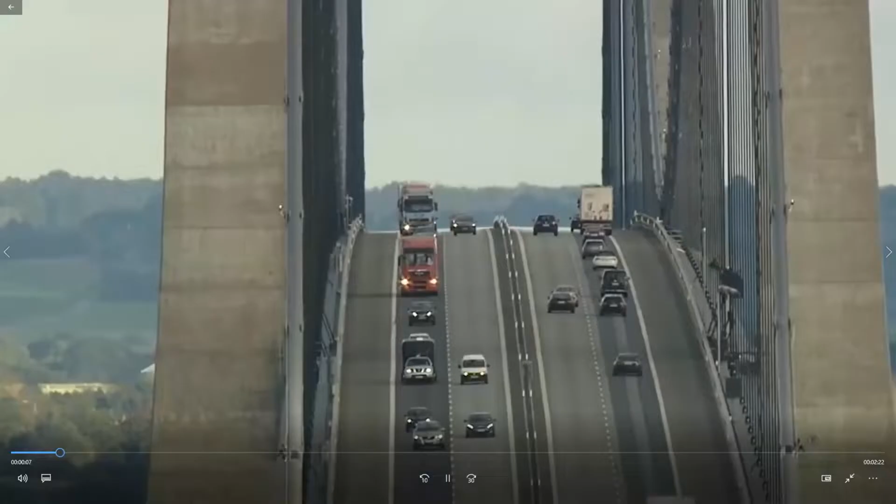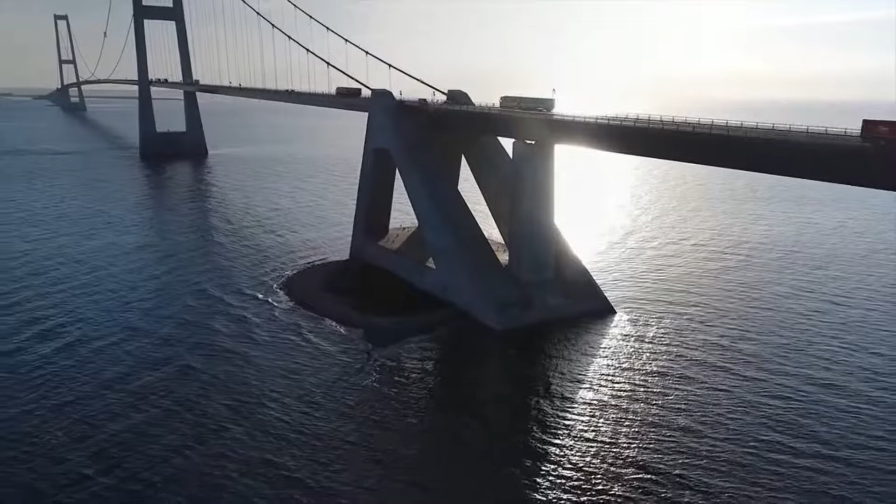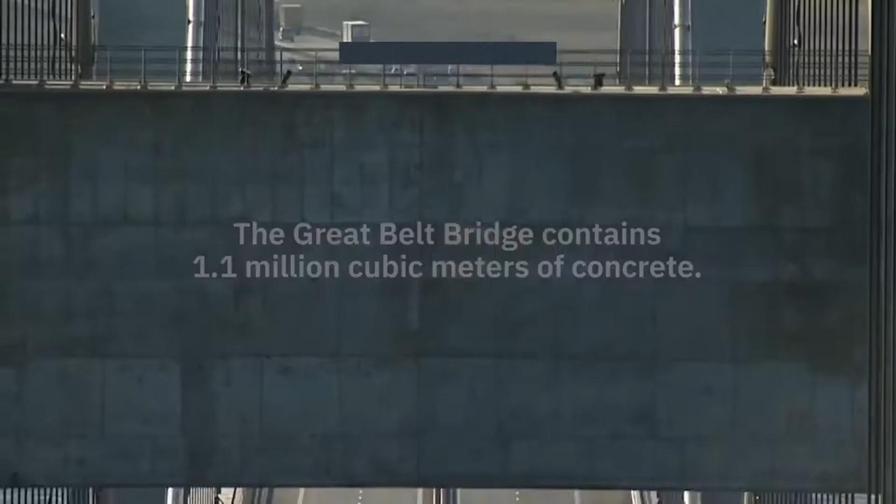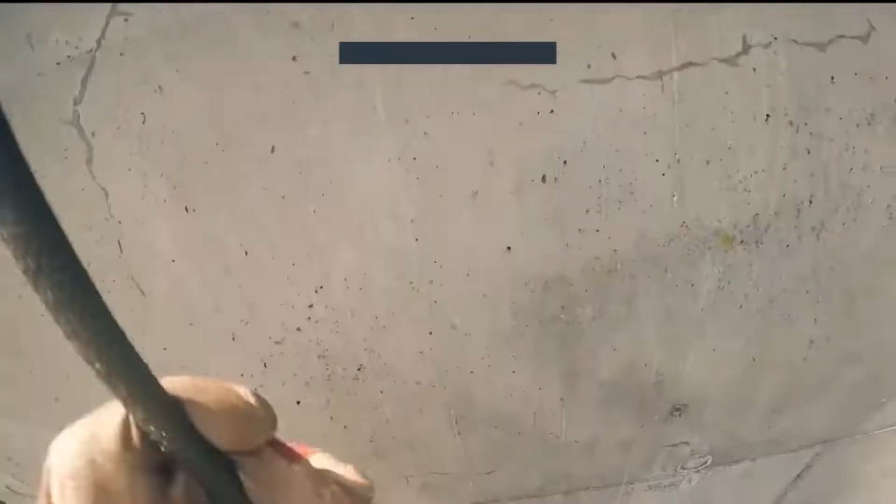To the untrained eye, a bridge appears to be permanent, strong, stable, and it's not really moving. But this is an illusion. If it hasn't been inspected in the right manner and maintained in the same manner, a very sad accident can happen. Maximo is a management system where we not only can write out work orders, but we see it as basically the foundation, the spine of everything we want to do from a digitalization point of view. The dream is that this technology can really help to reduce or maybe completely remove the risk of tragedies, collapse of bridges, collapse of tunnels, collapse of buildings. When we are having a bridge out in the sea, you have to be aware how the chloride is actually penetrating the concrete, because rust is one of the enemies for concrete structures. We literally have to hire mountaineers to climb the surfaces to actually do the inspections.

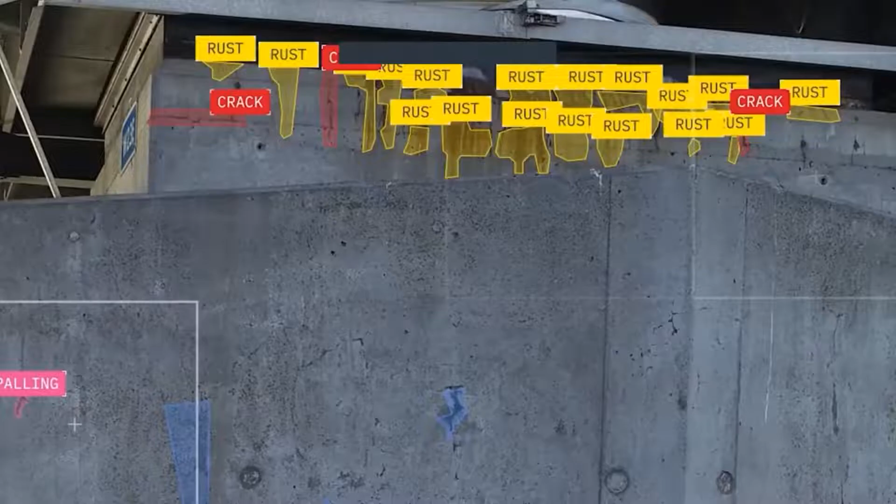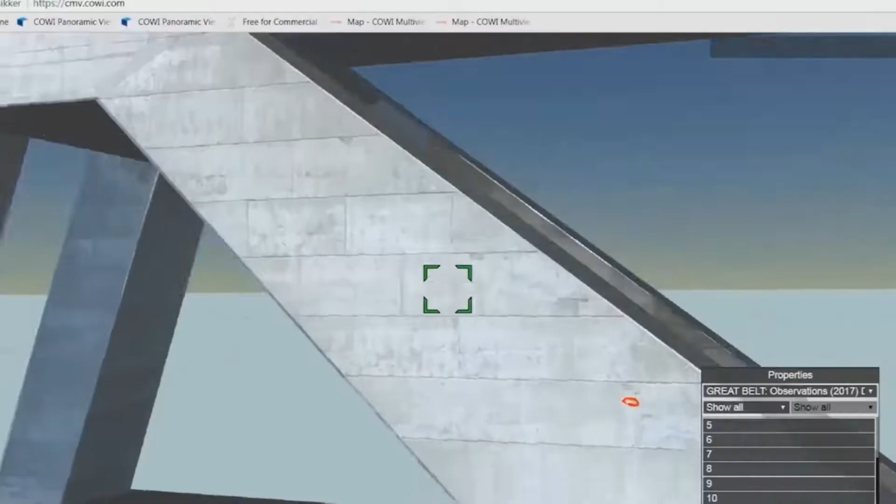There are many disadvantages to traditional inspections. People's life is in danger sometimes. Now we have changed that way of inspecting our concrete surfaces from the mountaineer climbing around to using drones now. Everything is done automatically. It's scalable. Scanning a bridge can take 1 day instead of taking a month. All this data that feed into Maximo from sensor, from document, from images and from other sources needs to be processed to extract knowledge, and that's where AI comes into play. There's a huge stack of informal data, unstructured data, and we need a machine that's able to read and process unstructured information. Maximo can do it in a fast way, in a repeatable way, in a scalable way, and once it learns to do the job, it learns forever. Now we have a way to show a complete picture of the health of a bridge. And it's not every second year or every 6 years we can do that assessment. We can do it from second to second.

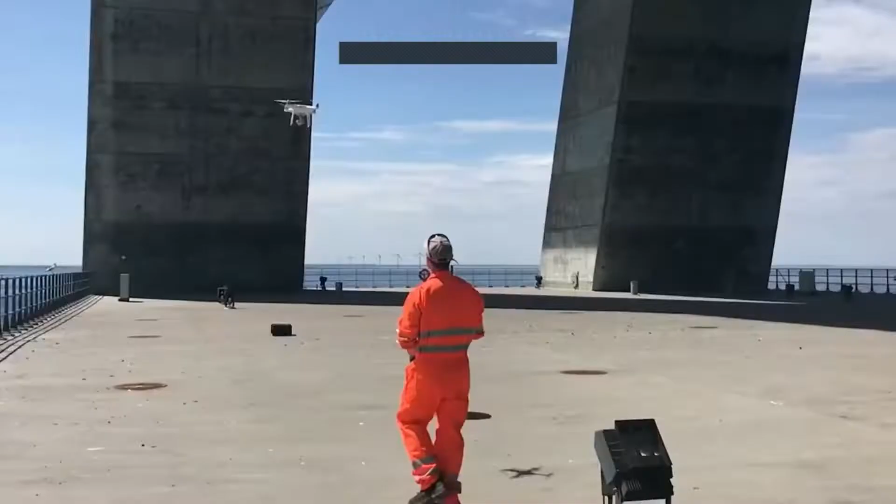If you are not energized with this, I don't know what. But I think for me it's very exciting to see all the different possibilities. And I'm happy to tell you that Ioana Giorgio, who is also working as a researcher and partner in the IMT project, is with us today. And Ioana, you will share more details of the technology and especially your own experience.

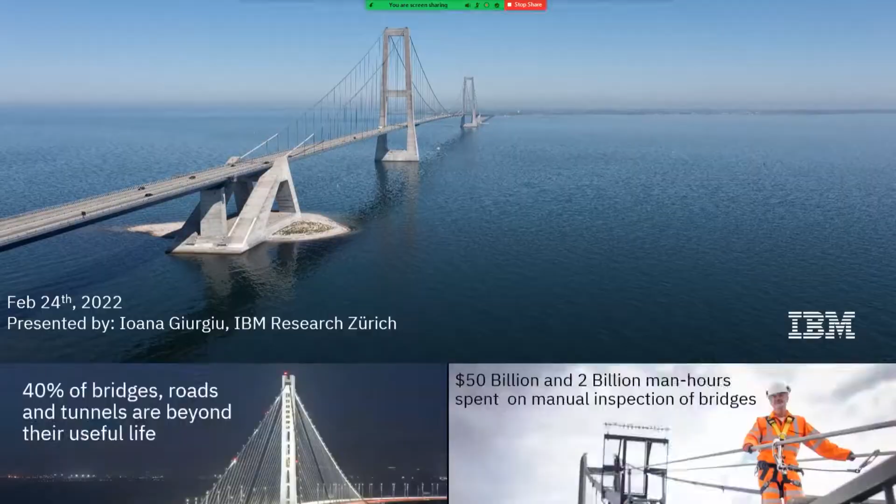So let's get started. So as you know, civil infrastructures like bridges, roads, and tunnels are actually essential for transportation. And more than 40% of these infrastructures across the world, they are past their useful life. So it's extremely important to make sure that they are in good condition, or if they need maintenance or repair operations, they can be done in a timely manner. That's the role, of course, of the reliability and civil engineers, who generally will go visit the structures and typically do manual inspections. Now, manual inspections are extremely time consuming.

So it is about 2 billion man hours that are expected to be put into the manual inspection of bridges alone. And of course, there is a high cost associated, about $50 billion, with everything that encompasses, of course, the travel time of the civil engineers and all the equipment they need to survey the bridge from all possible points.

Now, of course, what they do is they try to detect visually, right, whether that bridge or any civil infrastructure is actually in a good condition, because even one failure can shut down critical arteries. And so, moving to the next slide, how is it typically done?

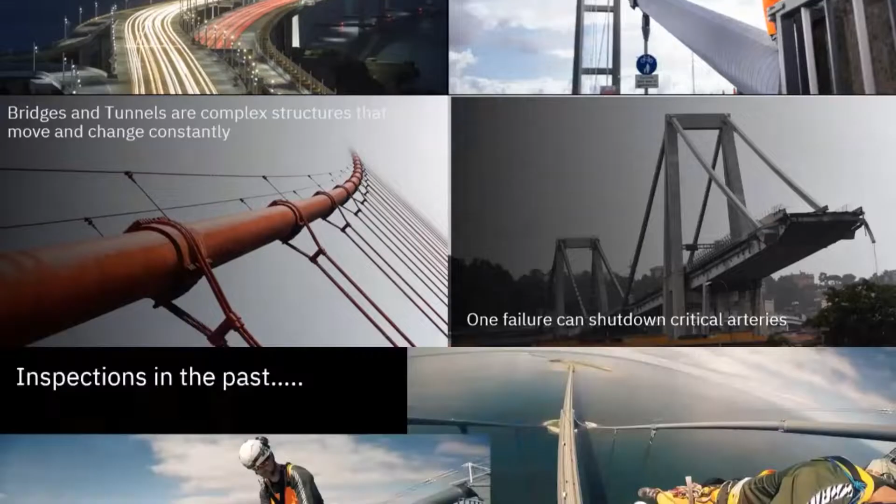So typically, or in the past, these inspections were 100% manual. So our experts in the field of civil engineering, they would go to the bridge, and of course, they would need to climb across the structure, look at it from all angles possible. Some parts of these structures are actually very hardly accessible. And so you can imagine that the whole process, just as we have shown in the video before, takes a very long time, and it can also be potentially dangerous for the civil engineers that do this.

And so the advent of drones and artificial intelligence, moving to the next slide, thank you, has allowed us to actually automate visual inspection. What does it mean to automate visual inspection? It means we can take drones that are equipped with high resolution cameras, and these drones can fly around a bridge. They can take thousands or tens of thousands of high-resolution images from all possible angles. It does not really involve human experts anymore. It is not dangerous anymore.

Of course, there are some conditions that have to be met, right? These drones depend very much on the weather conditions, so it's extremely important that drone flights are done when the weather conditions are appropriate. And of course, the goal is to obtain high-resolution images that are taken from more or less a constant distance to the bridge itself, right? And here is exactly the Great Belt Bridge that you are seeing from Denmark. Can you please move to the previous slide?

Thank you. In which about 20,000 images are typically captured with every drone flight, right? And each image is actually quite large. We are talking about images that are about 6,000 pixels by 4,000 pixels. So when one image is around 10, 15 megabytes, all the images that we are getting from a single drone flight are actually staggering in the hundreds of gigabytes, and sometimes they can even be close to a terabyte of data that we can analyze.

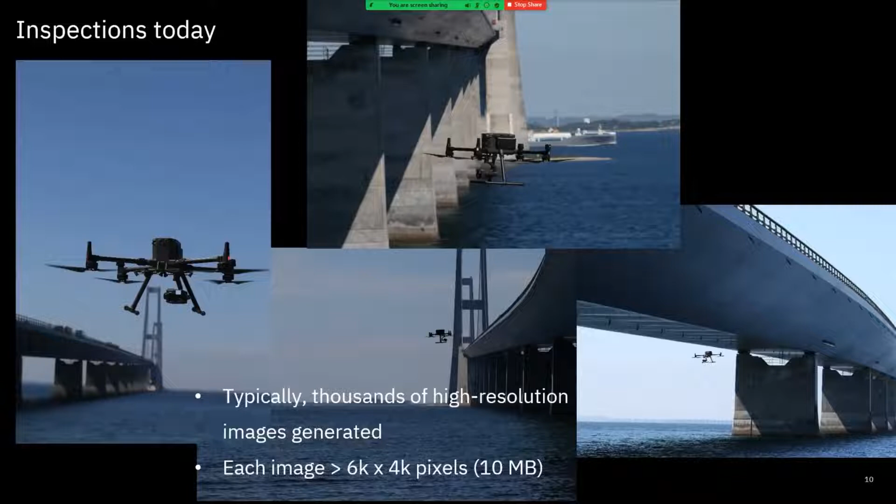And so what do we do specifically? We have a visual inspection pipeline that we have developed for civil infrastructures. The visual inspection pipeline starts from the moment where the drones have been flown around the bridge, and they acquire this high quality data, which are these very large images. Our purpose is actually to provide as much information to the reliability engineer and to the civil engineer as possible, right?

So the first thing that we are doing in the pipeline is to detect high resolution defects. What that means is we are not only interested to detect defects that are very, very visible, those are fairly easy to detect, but by using deep learning and computer vision methods, we would like to also detect very tiny and rare defects, which are equally important.

The other thing that we are achieving in this visual inspection pipeline is the photo stitching. What that means is from the images that have been captured by a drone, we want to reconstruct the structure of a pillar, for example, in the bridge. And why is that important? Because it allows us to disambiguate the defects, and it also allows us to localize them in a global coordinate system. This is extremely important when, for example, reliability engineers get a list of defects.

If they're able to localize visually exactly where those defects are located in the bridge structure, they can use that information to make a more appropriate risk assessment score. That means determine whether a particular defect is really critical because it is in a critical location or it is less critical. And finally, can you please go back to the previous slide? Thank you. We also have methods around defect measuring.

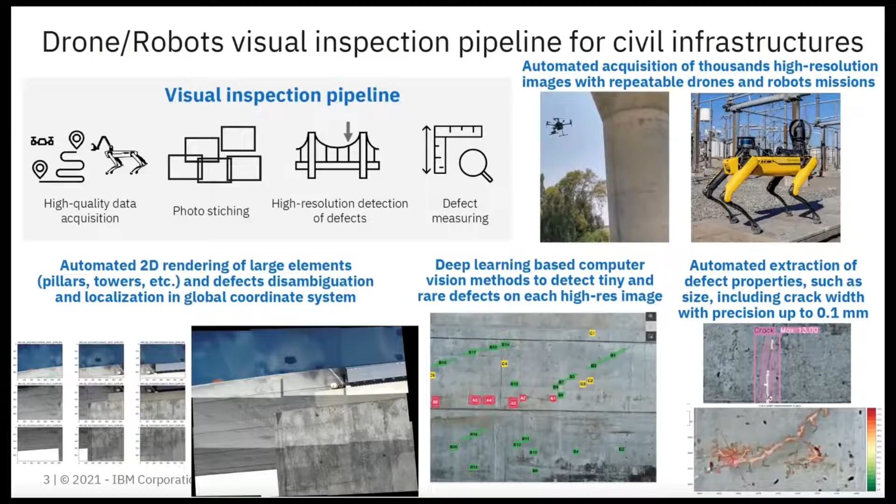Now, going to the next slide, I would just like to show you a couple of examples of the types of defects that we are detecting. And so, as you can see, we have quite a few types of cracks that we can detect. So your typical cracks with precipitate, which have this very distinctive white pattern, as well as net cracks. A net crack is actually a crack that has resulted in cracks spreading all over the place in all directions. So it really looks like a net.

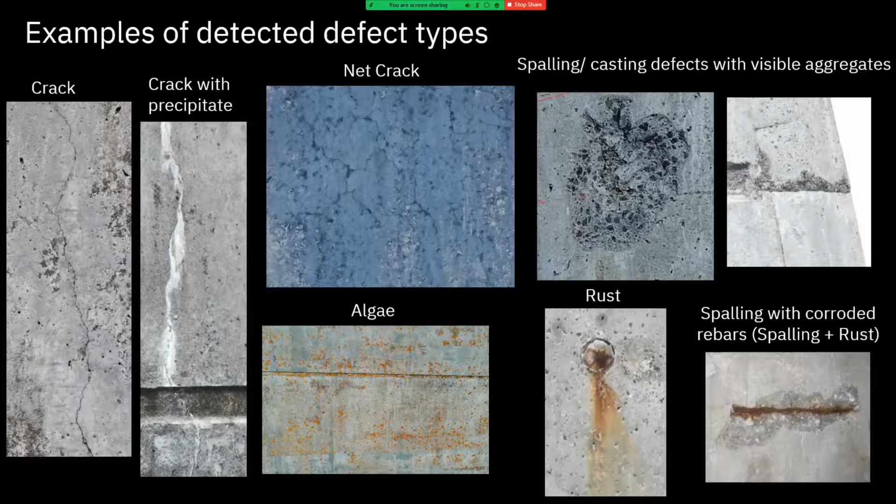We also detect spalling, and spalling means you have a defect where you can see visibly the concrete aggregate in the structure. We have algae, which is typically less critical, for example, than cracks, spalling, and rust. And finally, we have rust and spalling with corroded rebar. In particular, corroded rebar actually shows that there is already a serious problem in the structure. Now, going to the next slide.

Apart from the fact that our capability has been included and can be used by IBM's customers through the Maximo Visual Inspection offering, we also have a platform that has been developed at IBM Research, which is called One-Click Learning. One-Click Learning, or OCL, is a platform where we actually empower engineers and infrastructure managers to take pre-trained AI models and to use them for everyday inspections.

So once the images have been acquired with drones and are available in our OCL platform, what we are offering is the detection and characterization of the defects. That means we will detect them with a very, very fine-grained granularity. We will measure the defects and, of course, present the civil engineer, the end user, with other important attributes. At the same time, we will use the image stitching capabilities to reconstruct the infrastructure element, and so allow the civil engineer to understand exactly where the damages are located in the structure of the bridge.

We also provide powerful data exploration. So what we will tell you is exactly how many defects have been detected, where they are located, what is their area, what is their severity, criticality, size, and so on. And of course, anybody is able to drill down into any of these types of defects, and finally, a quick extraction of

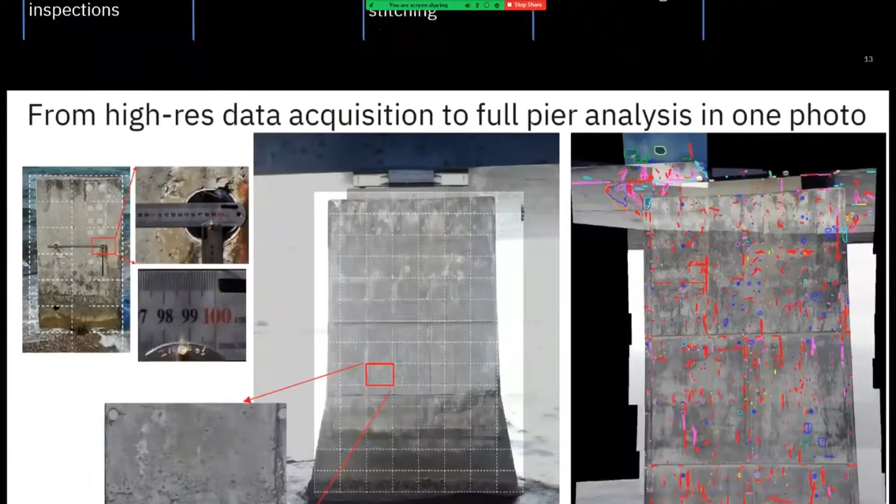And I think I just have one slide left that I would have liked to cover. I'm just showing here for everybody to get a better sense of what it means now to acquire high resolution data and then to analyze this data and to go to a full pier analysis in one photo. So this really involves the image stitching, but at the same time also the defect detection all in one. Basically, from a lot of images that have been captured, let's say from the north pillar of a bridge, we reconstruct that

pillar side, and as you can see on the right side of the slide, we will show the end user the structure itself and all the defects that have been detected in the structure, color-coded depending on the type of defect they are. So for example, red typically represents cracks, and I think we use blue for spalling and so on. And in the middle of the slide, what you are seeing there is also a very nice capability which has been built in the Zurich team at IBM Research, which is a type of a grid map.

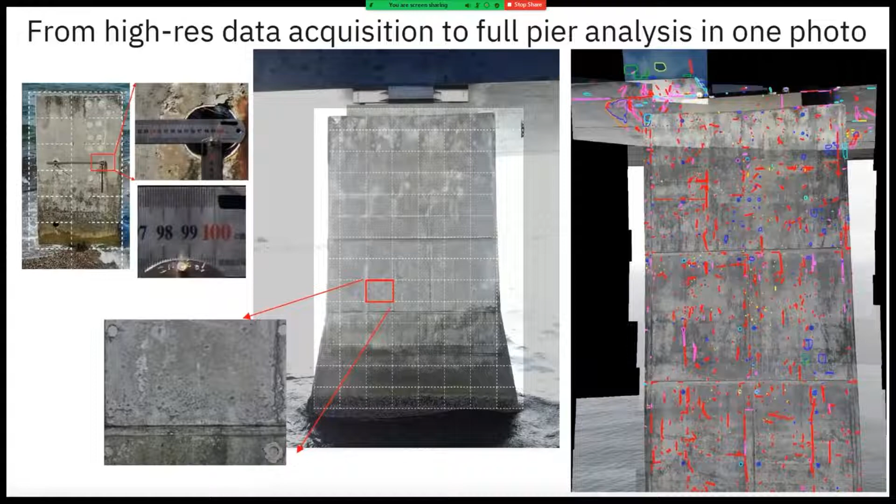So once the full pier has been stitched together, we allow users now to just hover with the mouse over the grid. And of course, if you are particularly interested in just one small portion of the pillar, then you can zoom into it and see exactly what are the defects that have been detected there. And you will also get a comprehensive list of all the defects with their assessed risk and so on. And I think this concludes my 10 minutes.

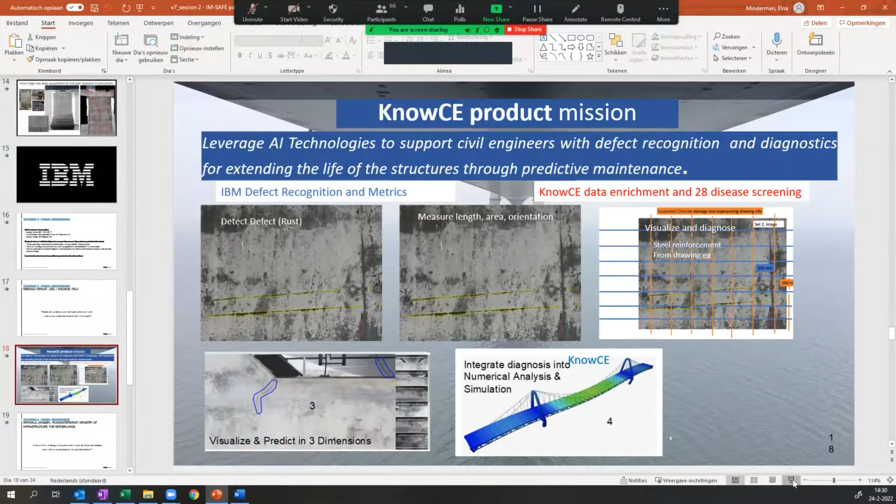When an engineer with mountaineering skills climbs on that bridge to inspect it, they do many things at one time. They see the defects, sometimes they ignore them because they screen it out. They know how the bridge is built, they know the drawing in their head because they've reviewed it before they went on it, and they know how it was when they inspected it.

So at one time, they are doing many things as they are on the bridge. When you simply get an image, some of that engineering context is lost. What IBM is doing that's fantastic is detecting the rust. In this case, in the image, you have two lines of rust and a pattern that looks like it ought to be investigated. They also measure the length and area and so on.

To that, what we do is what I call data enrichment, and then screen for diseases. What I mean by data enrichment is we know what is in the drawing: how far apart the steel reinforcement bars are, what specification they are, how much concrete cover there is. And you heard Bjarne, the CEO of Sund & Bælt, talk about

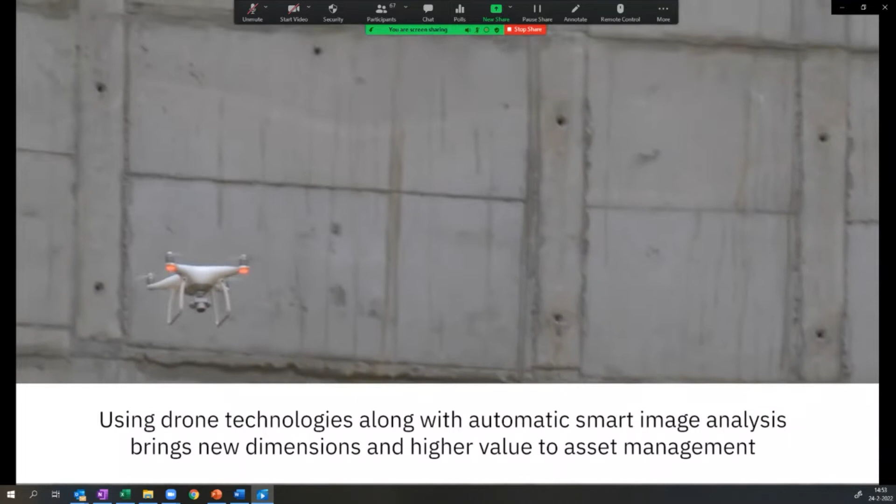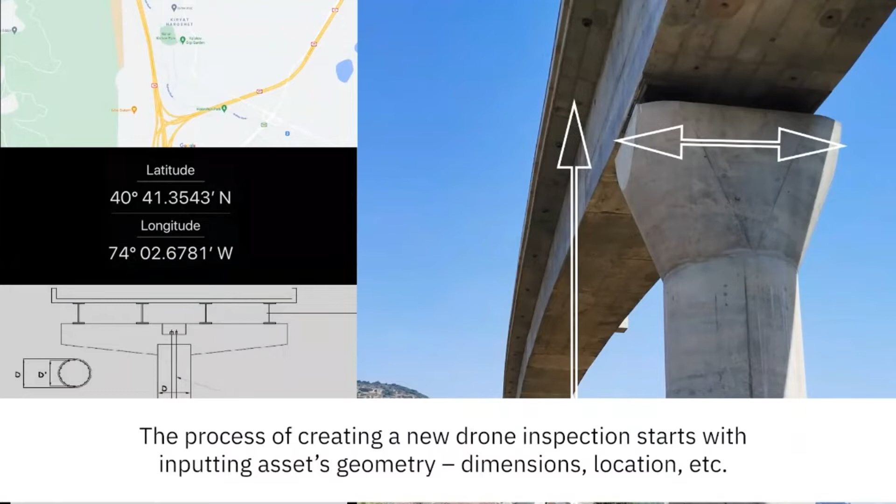But essentially, it shows more in detail what Joanna and the rest of the colleagues in our team are doing. So the first part that you see here is about the drone part. It's done by our colleagues in Haifa. Some footage just to show you what happened, but here maybe the interesting part is how they can plan how to scan, for example, this complex type of pillar, and they have developed really a platform that enables to plan the mission offline and then execute, let's say, online, just pressing a button and monitoring how the

drone flies around. So here you see some footage that shows that, and really this goes in the direction of being able to repeat this for every similar pillar, right, at scale. So once you are able to automatically perform this operation for one pillar, you can go and do it for as many as you want.

And then the second part, which you see now, is really the detail of what Joanna presented before. So we have built this platform, we are still building actually this platform that puts together all the components from detection to stitching to measurement. And what you see here is some screens that show, for example, statistics extracted from an inspection of the Storebælt Bridge with 22 pillars.

And here you see some diagrams that show how many cracks have been found, for example, on this south face of pillar 2, how many other defects. And we are creating tabs here that show information, for example, list of defects detected, the area of such defects, etc.

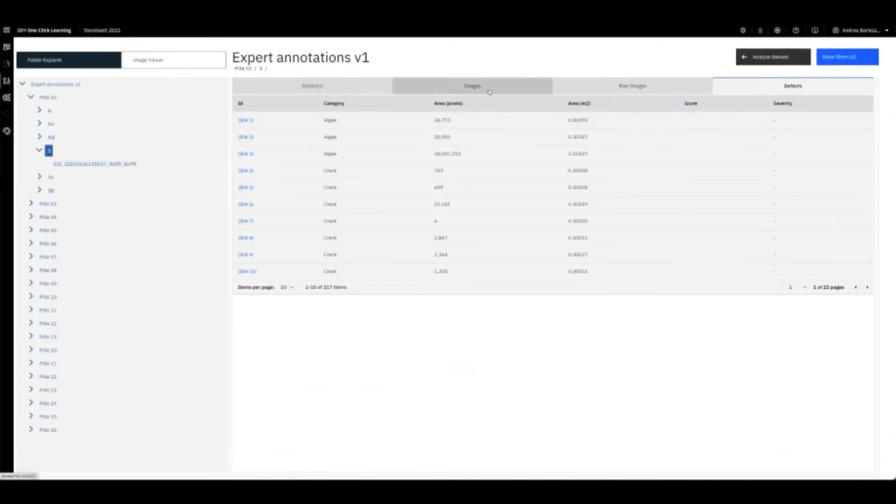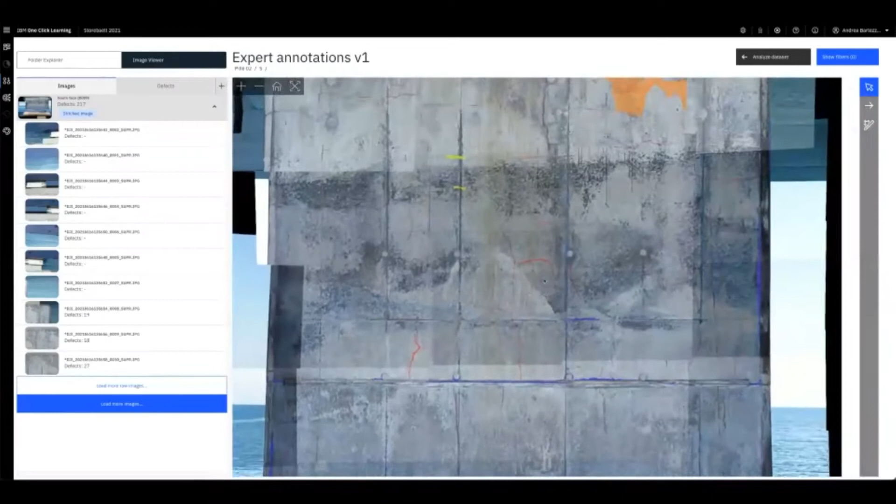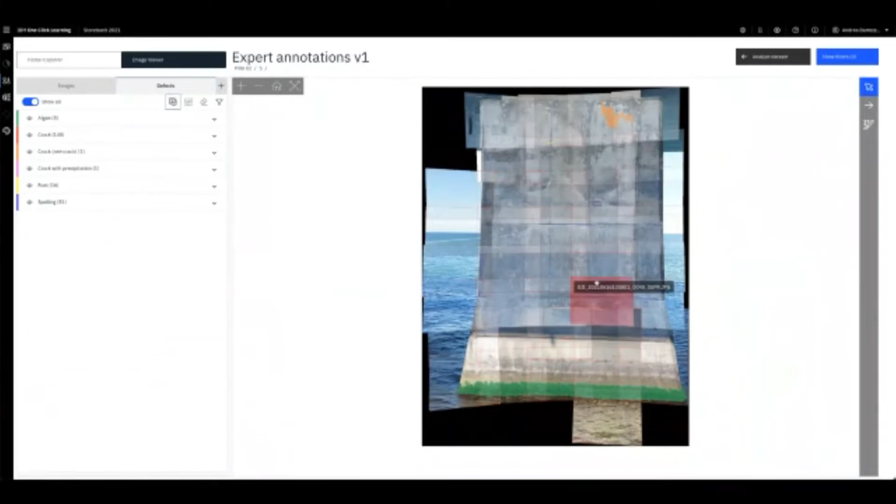And maybe the most interesting part is now, so you enter in this view where you see really the full pillar, and you can browse, go around, look in the details, the cracks, everything. So it enables a civil engineer to do a sort of offline inspection where really all the data is digitalized, and the rest of the video shows how to play with the interface, the images, for example, that have been stitched, in this case I think around 50 or 40 images.

Yeah, that's an overview of the tool that shows in practice how we can really digitalize the inspection for this bridge. At some point, I think it shows also how we can search for defects. In this case, it's clicking on one crack and marking, for example, the severity of this crack, how dangerous this crack is, or you can add some comments.

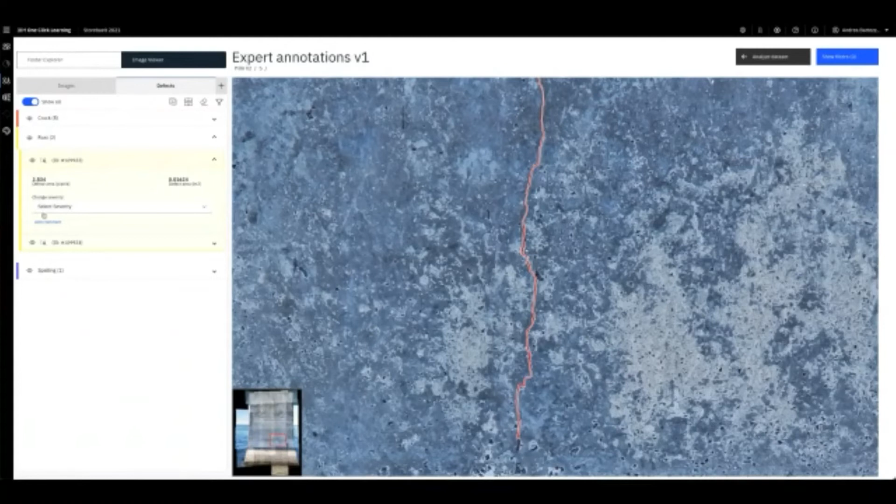And I think later in the video it shows also how to search for cracks by area, by properties. So it enables essentially to screen maybe 100,000 defects and focus only on the major ones, like it is doing in this moment. Yeah. I think more or less, that's the video.